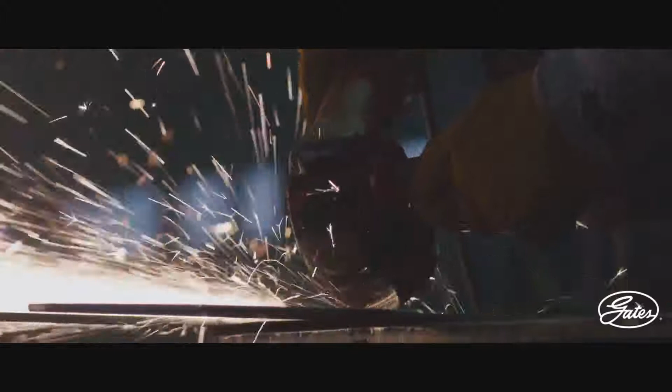A reputation is built year by year, customer by customer. It is forged by premium quality, tireless innovation, steadfast reliability, and an unwavering focus on customers.

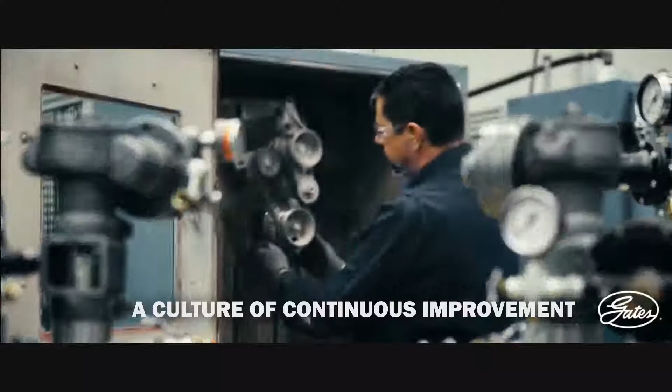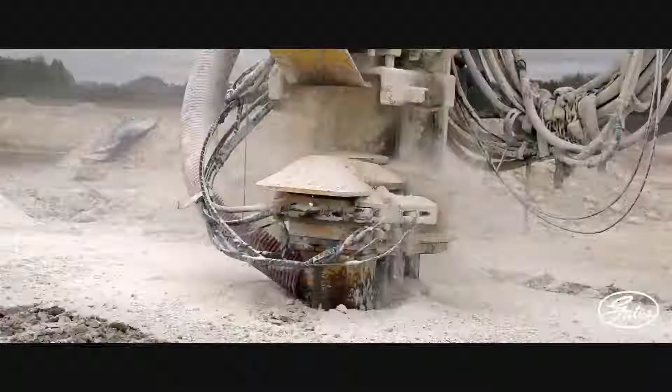Over more than a century, Gates has earned its place as a pioneer of highly engineered power transmission and fluid power solutions. We have built a culture of pride and possibility with an ever-expanding family of dedicated employees around the world. We are inspired by our customers, whose insights and expertise have led to some of our greatest innovations.

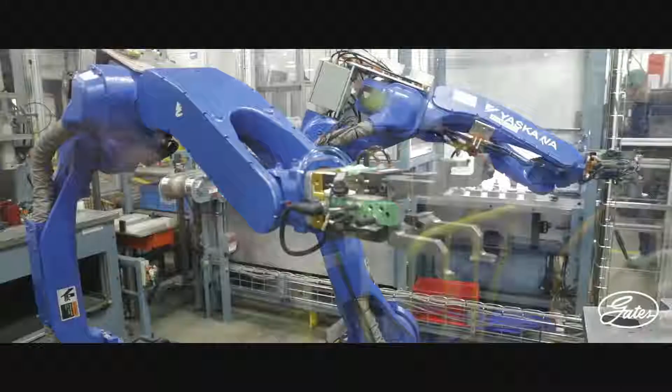At our foundation is a deep commitment to materials science-fueled innovation and the delivery of high-quality solutions. How can we make systems smaller and lighter? How can we reduce downtime? How do we improve efficiency, safety, and cleanliness? These questions drive us to explore, to find new ways to realize the promise of our products.

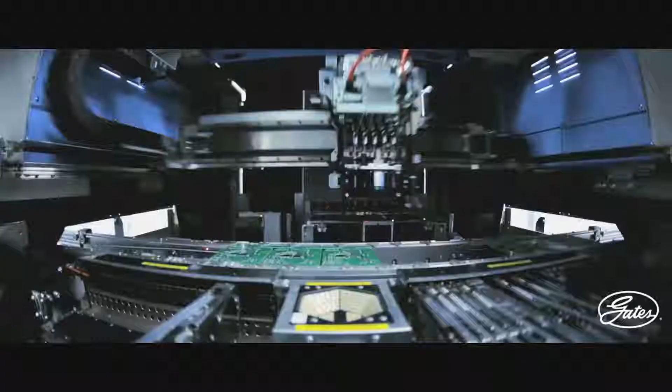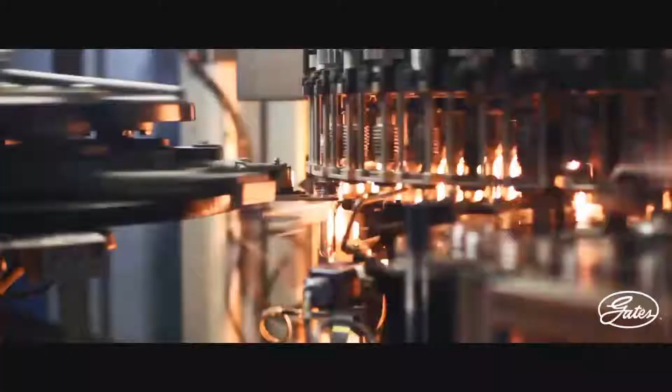Gates solutions play essential roles in a diverse range of applications across a wide variety of markets, from harsh and hazardous industries such as agriculture, construction, energy, and manufacturing, to everyday consumer applications such as printers and power washers, as well as virtually every form of transportation. We proudly serve our customers throughout the world with an ever-expanding product line, including broad aftermarket catalog coverage.

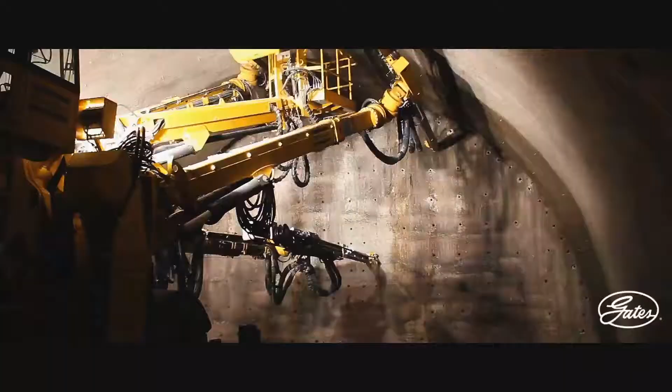Today, you find us in applications big and small, in the evolutionary and the revolutionary. At Gates, we believe that great companies don't just make a product, they make an impact. They redefine what's possible.

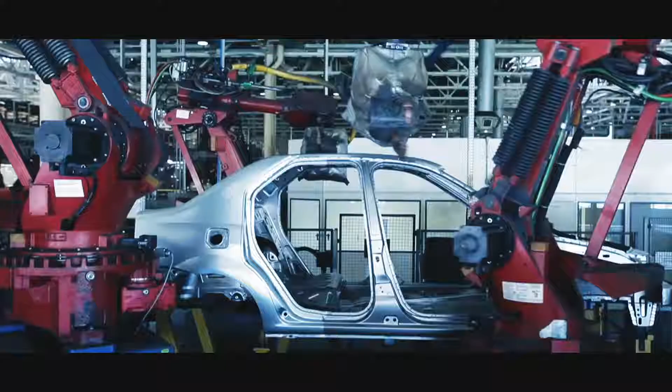Our customers are truly global. They range from small OEMs that might make lawn and garden equipment up to the biggest agricultural companies in the world, auto manufacturers, truck and bus manufacturers, machine manufacturers, distributors that cut across virtually every industry on the planet.

I have the opportunity as an engineer to think about, here are some problems, how could we solve them? How much can we improve a product? How can we improve what our customers do? And really think about endless possibilities, not just small incremental improvements.

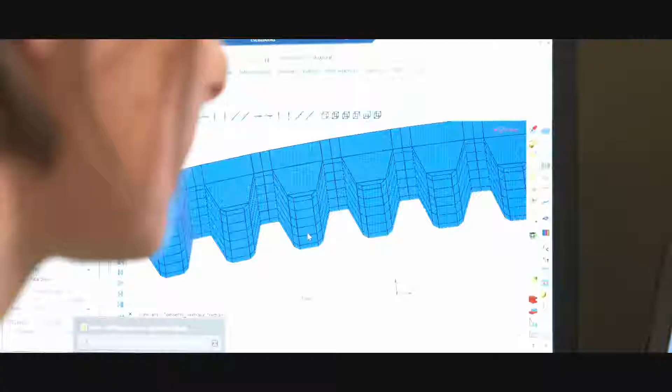Gates really drives its employees to keep innovating, try to stay ahead of the technology, really dive deep and explore problems. It's just really exciting.

It really starts with the customer, and there really is an innovation process where we think about what's going on in the market, what are the trends we're seeing, the need for longer life products, lighter weight products, cleaner, safer products. And there's some common themes that cut across industries that we bring back into our innovation processes.

Driven by possibility means to me that we're going to try and use our products in applications where people never thought it was possible before. We've entered into, I think, a new realm where the science and the engineering are starting to come together and enable us to provide new products that we haven't considered in the past.

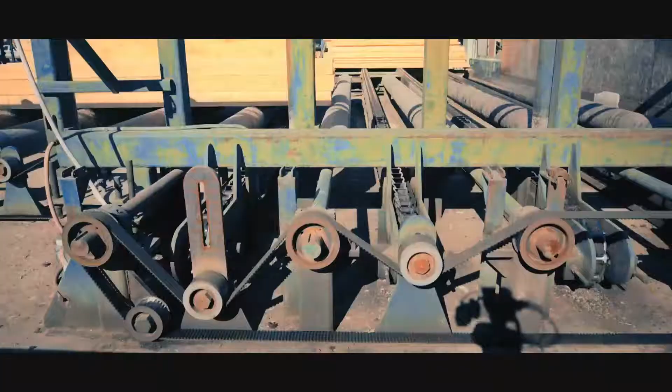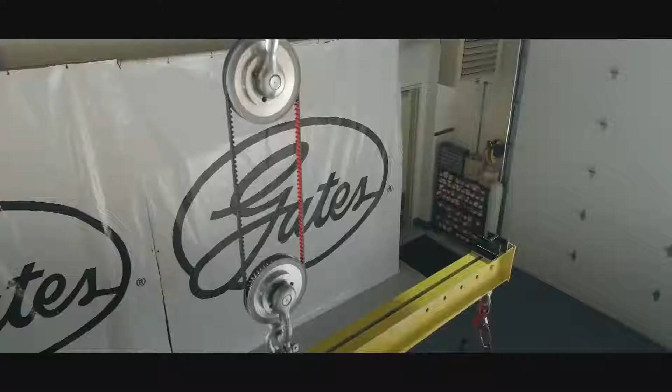Applications such as places where they're using huge industrial roller chains that are very heavy, require a lot of maintenance. How can we put a belt in that application that gives the customer less maintenance, better efficiency, more uptime? Probably the best thing for customers is they're always looking for a market edge as well. When we can bring innovative products to them that are best in the industry, then they can compete much easier with their competitors.

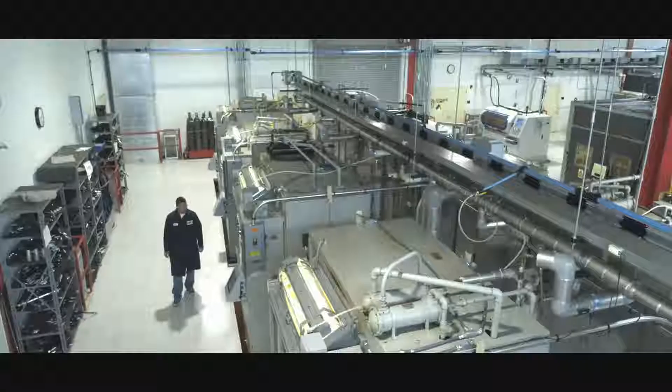Gates is unique amongst our competitors because we own and develop so much of our own material science and material technology. And we have our own compound development. We do our own design of tensile cord, fabric, textiles. Everything is Gates developed and Gates owned.

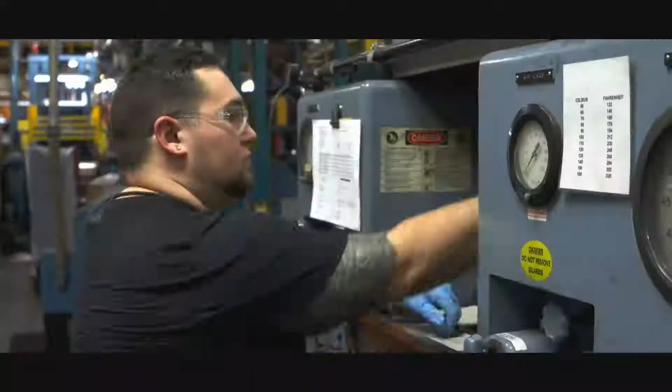We can change it and do whatever we need to make it better for the customer. We have specialists in metals and polymers, rubbers, plastics, and we all work together every single day to make sure that not only do we have one material that works, but we have a whole ecosystem of materials that works together.

Innovation is not just simply an invention, but it is taking an inventive idea and transforming it into something useful for an application, for a customer, for a market. So for us, material science is the core of innovation, because if you don't have that material and the science to put it together, you don't have innovation. You don't have invention. You just got ideas.

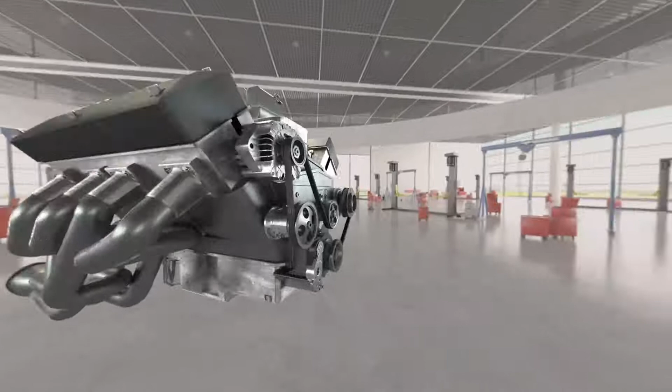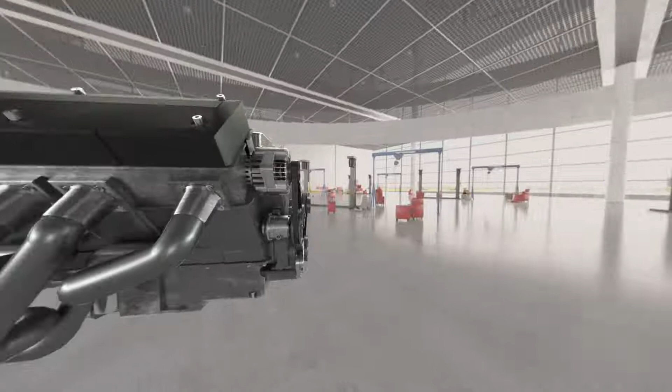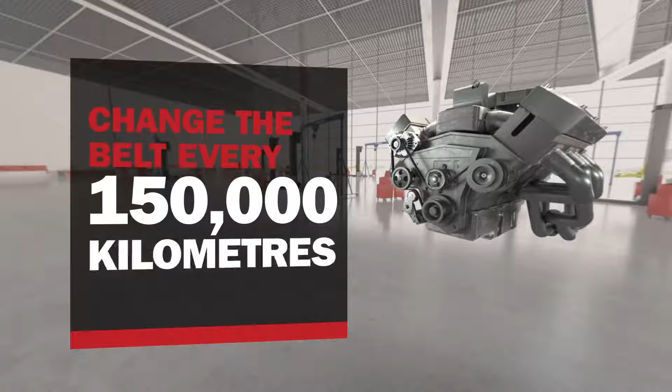They rarely break dramatically. Instead, they wear over time because all components in a system wear at the same rate. If the belt is worn, the tensioner is likely worn too. Worn components put the entire system at risk. Belts rarely crack, peel, and get brittle like they used to. Modern belts just slowly grind down, becoming less efficient and reducing the performance of all the other parts in the serpentine system. It's important to change them every 150,000 kilometers, but it's difficult to explain that repair to a vehicle owner who isn't experiencing any major problems.

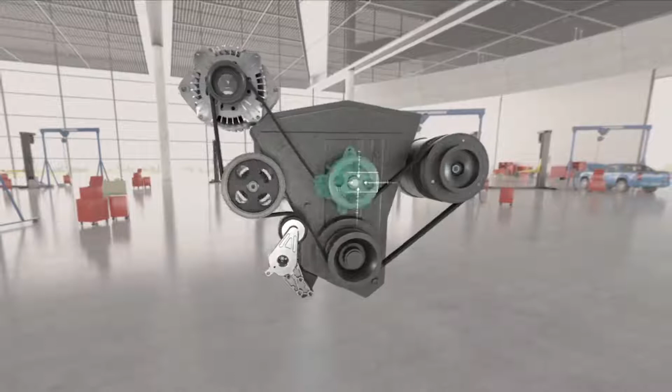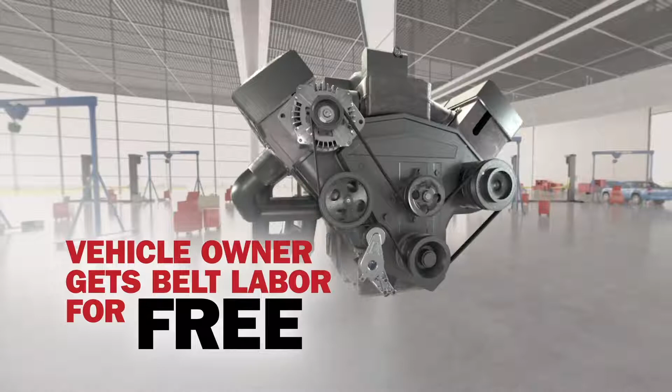So the key to helping drivers replace the belt and tensioner more often is to do it when making a more obviously critical repair to the alternator, AC compressor, water pump, or power steering pump. If you replace any part that requires you to remove the belt while making a repair, that's the perfect time to replace the belts, tensioner, and pulley too with our easy-to-use serpentine kit. It's a great deal for the vehicle owner, essentially getting the belt labor for free. Plus, that complete serpentine system repair is going to make the whole system work better, keeping new parts from wearing out too fast, ultimately reducing comebacks and cranky customers.

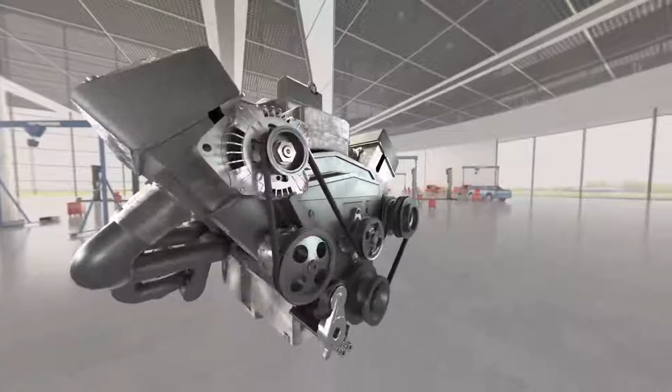That's why we like to say, if you remove it, replace it. Finally, it means more efficient and profitable repairs for the shop, with less wasted time in the service bay because we all know that time is money. That means peace of mind for the driver and fewer comebacks for the shop.

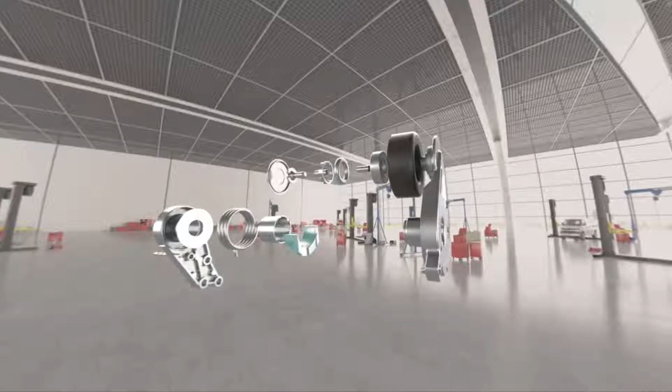Of course, sometimes you do just have someone come in with a squealing belt, and the easy thing to do there is just to swap out the belt. But wait, the tensioner is often the base source of the problem. Over the course of 150,000 kilometers, the damper experiences over 12 million impacts, eventually putting less consistent pressure on the serpentine system. Loss of tension can create squeals, noise, and heat, leading to premature belt failure, and it results in loss of power to engine components like alternators and AC systems, decreasing performance.

A belt might fix the problem in the short term, but a worn tensioner can cause that problem to come back before the next oil change. So remember that when you have a problem with a squeaking belt, think tensioner first. Replace that tensioner and pulley along with the belt for a complete system smart repair.

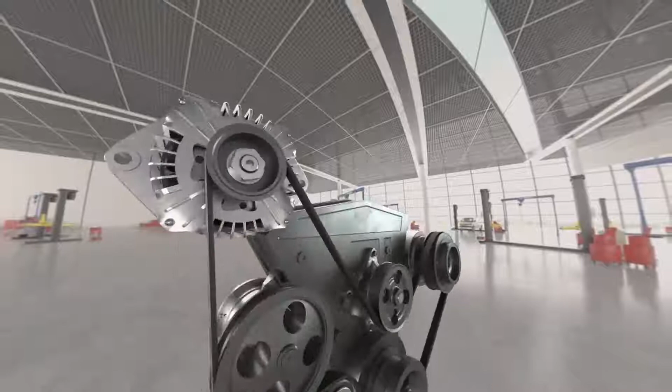The important thing is that belts and tensioners can be a key part of the repairs you make to the serpentine system. Just replacing them when you're doing an alternator, AC compressor, or water pump job can save your customer from a more expensive repair down the road. So just remember, if you remove it, replace it. And when you need to address other belt issues, focus on the tensioner first.

You have to think about a world of parts, and our serpentine kit is just a part of that universe. But it's critical to the performance of your customer's car and can make your repairs more complete, more profitable, and more responsible, resulting in fewer comebacks. Now that's System Smart.

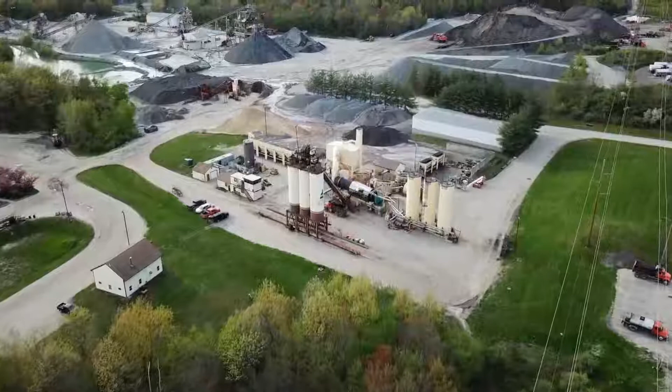Me and my brother, we started back when we got out of high school. We did our first paving job in 1978. We bought our first asphalt plant in 1986, and today we have 5 of them and 350 employees. Back in the 80s, if you put down 500 to 700 tons a day, it would be a great day. Today, our goal is 2,500 a day.

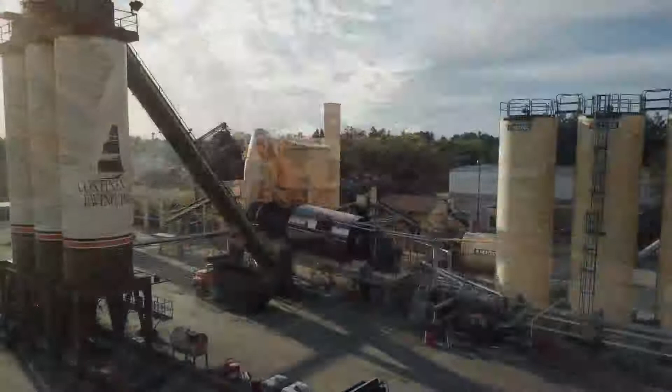I enjoy the challenges. We always try to do more than our competitors, get more down, figure out a faster, better way to do it. All our employees, me and my brother, take a lot of pride in what we do. We pave the smoothest roads, and that's the enjoyment of it.

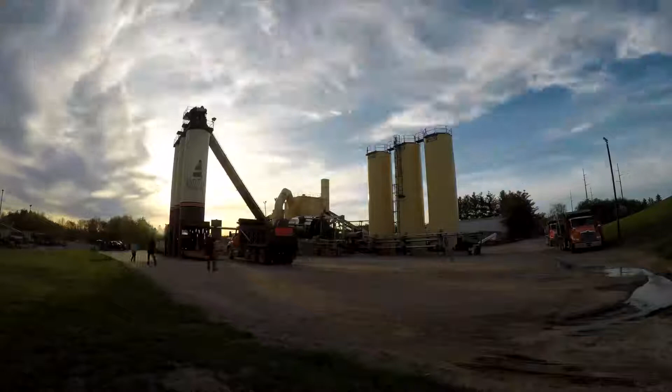Continental Paving is a large player here in New England. Mark is very focused on his employees and taking care of them. Any company is only as good as the people, and without good people, you don't have a good company. Gates was definitely the solution to a problem we had from a maintenance standpoint.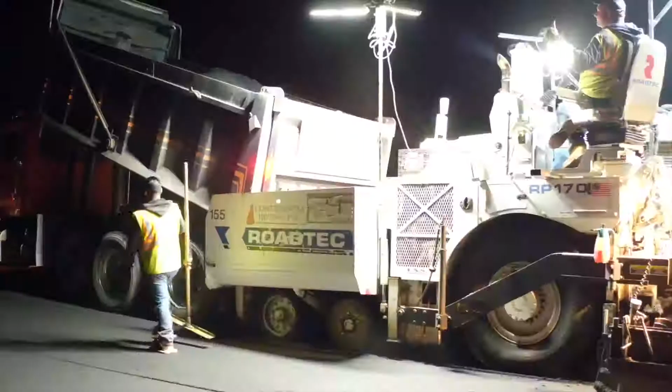A guy that works on an asphalt plant works 12 hours a day. It's a pretty hectic pace. You have 30 trucks, a 10-man paving crew. If any one thing stops, it shuts the whole operation down, and that's what makes it extremely intense. If one piece of the puzzle fails, then we don't open the road in the morning and create a traffic nightmare, and the world hates us. We try not to do that.

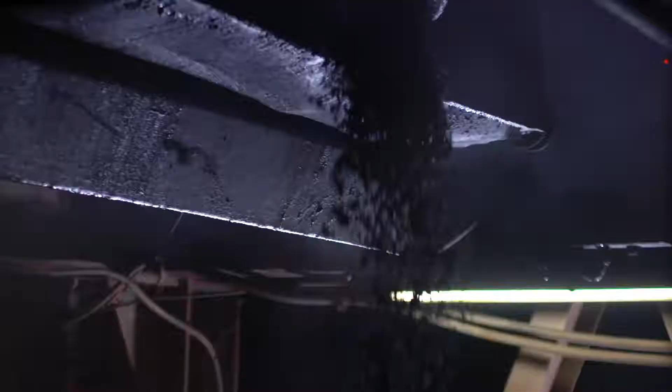It's important to have products that are sustainable and give you the most efficiency and long life. Mark, my guy that runs the plant here, came up with the idea of the poly chain because he hates changing the chain on a weekend. It's 95 feet in the air, and it's also heavy. We typically would get a crane, a man lift. It took a day and a half, so it always ended up being a weekend. When you have to work on a Saturday or Sunday, guys get burnt out, and I hate burning out employees. That's a big, important thing for us, so our people have family time.

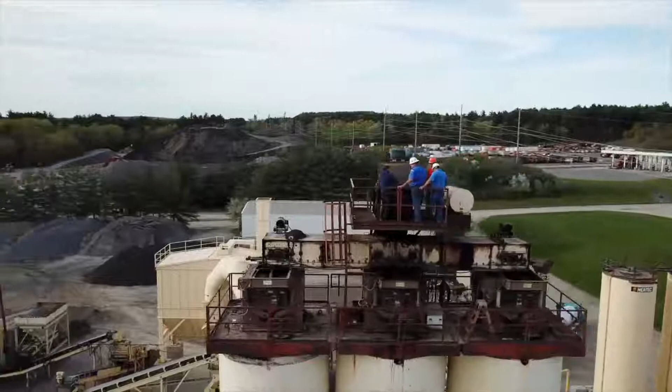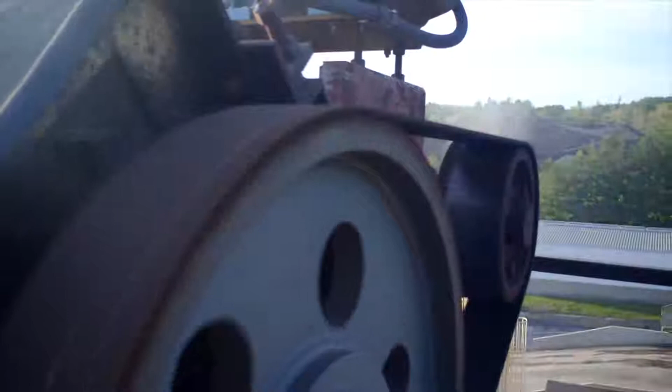We captured what he had for chain, and we came up with a solution, and the solution was the 19mm pitch belt. They installed it almost 2 years ago, and it's been working flawlessly. It's exciting to have this kind of technology and this horsepower behind me as a district sales manager.

Any product is only as good as the people behind it. The team from Gates came in and did a great job. Gates is a great company, their product's good, it's very reliable, and the people make it very painless. It's been nothing but success.

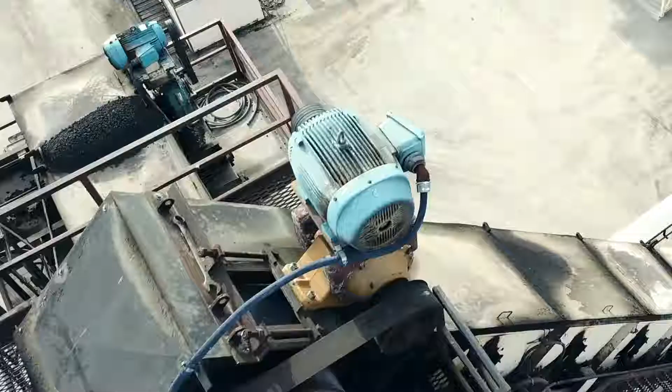The reliability goes way up, and you don't have to send a guy up there daily, or every other day, to oil it. You don't have oil running down on everything, so there's no oil for someone to slip on. It's just cleaner, neater, it's just sweet. The poly chain gets a quick return on investment. Never go back to a chain and a sprocket. The poly chain gets rid of misery, and anytime you get rid of misery in today's work environment, I think it's an asset to any company.

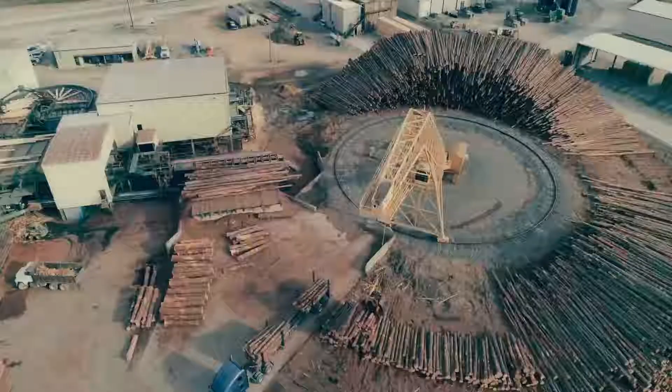We're in the 5th generation family-owned business. When I came to work here in '87, we were sawing about 150,000 board feet a day. Now we're doing 650 or better a day in 10 hours. My title at Culp Lumber is maintenance manager.

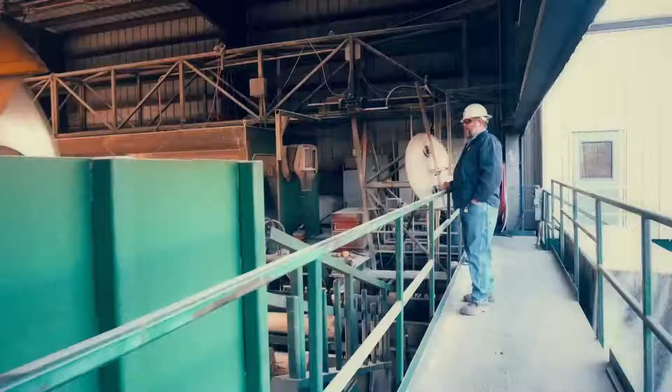I've always loved being in the woods, always loved doing something with wood. It's in my blood. Then when I came to work here with all this automation, I was like, wow, man, this is where I want to be.

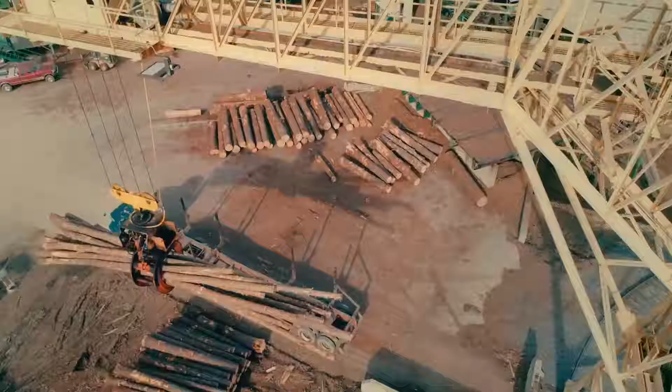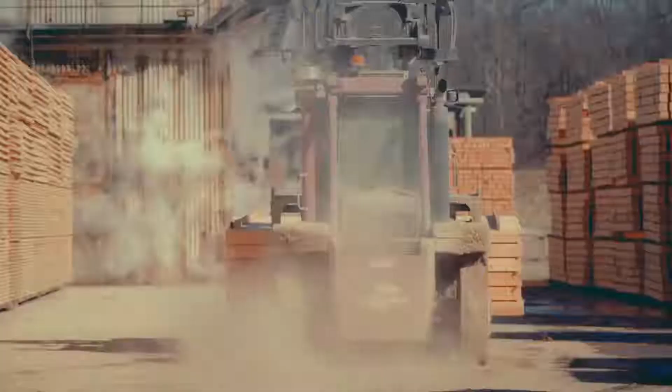Charlie Smith, he's a great guy. He's all about continuous improvement. He wants the mill to run better today than it did yesterday. The Gates Corporation really took us from way down here and put us way up here.

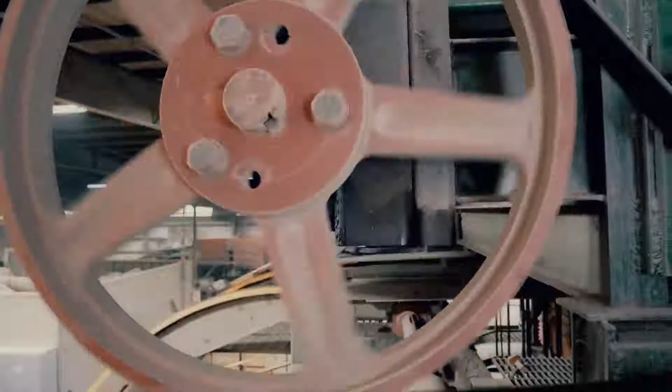We were having a lot of trouble with our band mills. We were going through 2 and 3 sets a year, $2,000, $3,000, $4,000 a set. So John, our Gates guy, comes by and says, have you ever thought about putting a poly chain on the band mill? To be honest, when you take off belts that are this wide, 10 of them, and put a little 2.5-inch wide, 68mm wide belt on there with 150 horsepower, I really didn't have much confidence in it.

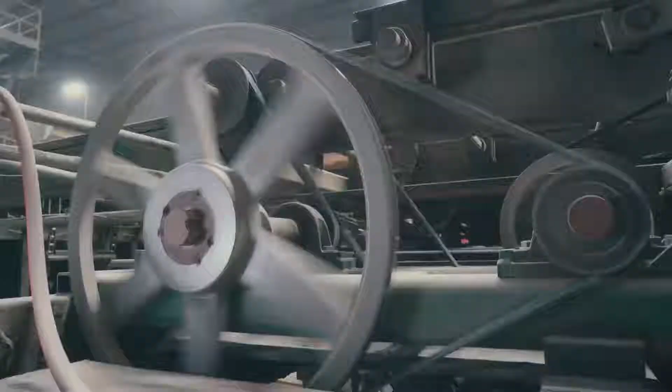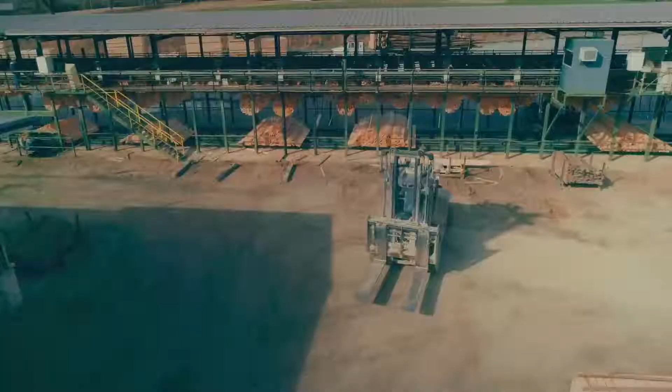5 years later, still running. We were able to retrofit that with a belt that's 65 feet long, one belt doing what many chains used to do. He got away from backlash, away from retensioning, away from safety issues when the boards were falling off on the workers.

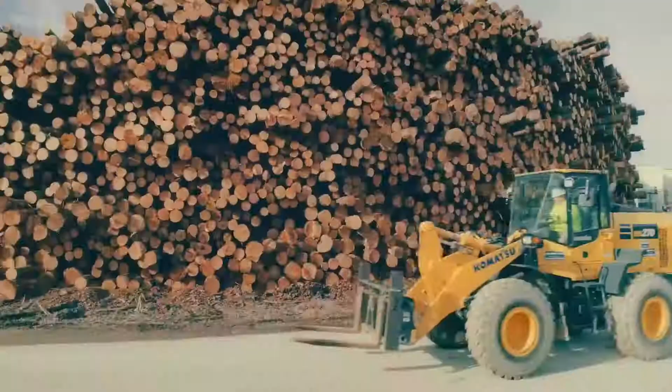Now our bands are exactly where they're supposed to be, but better than that, now we don't have a guy pouring oil on it, and we never have to retension it. Everything here now has been converted to poly chain, and it's really for longevity. How long the poly chain lasts, call me up in 5 years, that's all I can say, and then maybe I'll know.